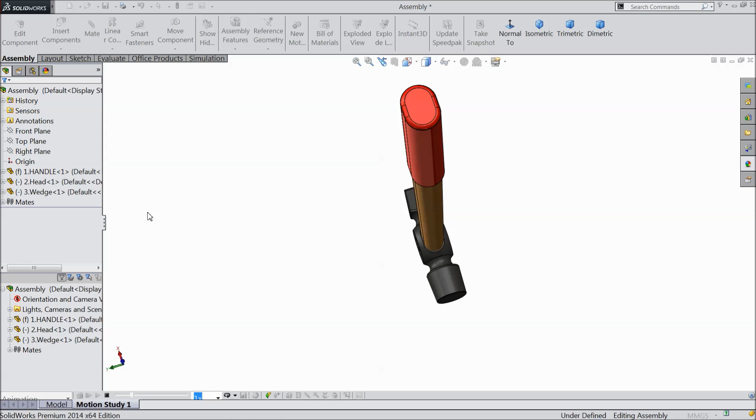Today we are going to design and assemble a simple hammer. This is the real hammer. We will design each and every part and you will see how to make the assembly. I hope you like it. So let's see how to do it in Solidworks. Here you can note down the dimensions.

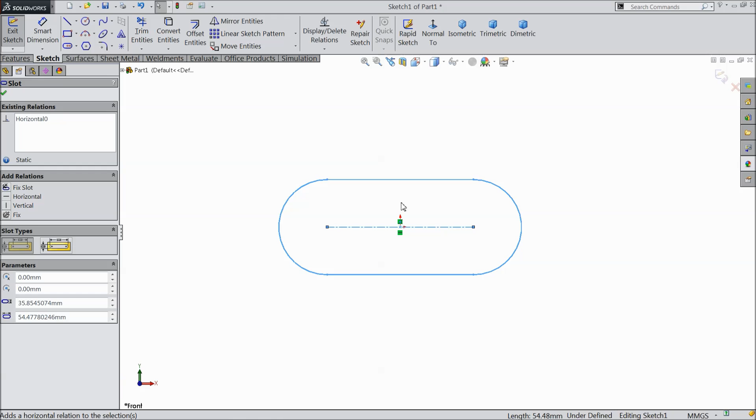Let's make the first part, the hammer handle. Select right plane, front plane, sketch, and here select center point straight slot. Draw a straight slot, exit, select this line and make horizontal relation. Now let's define this length, keep 6 mm, and select this radius and keep it 5.5 mm.

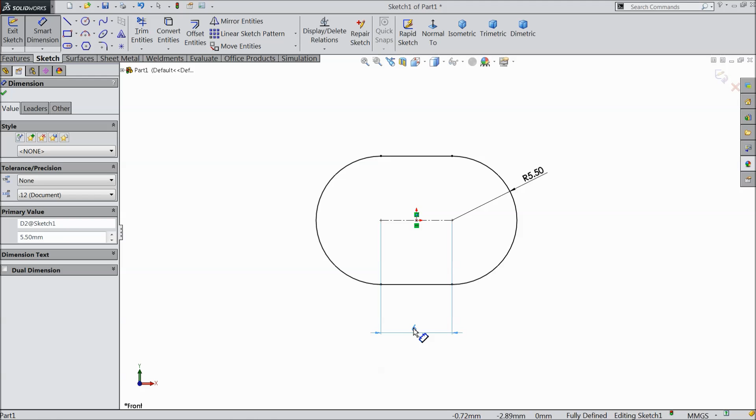Now let's extrude it, up to 250 mm, and select here 0.7 degree. See, it's going to be sharp. We want upward outward direction. See, okay.

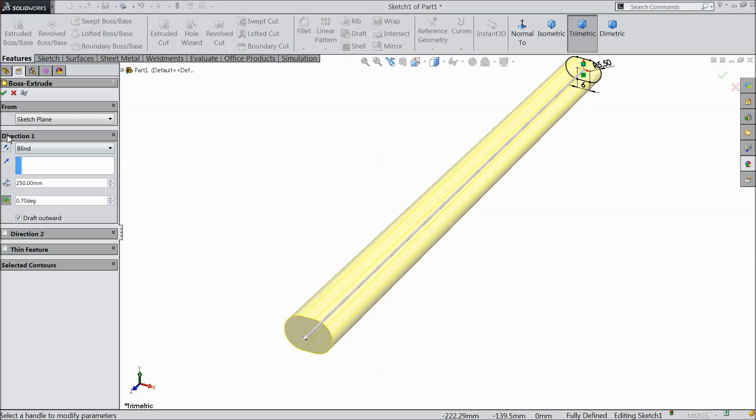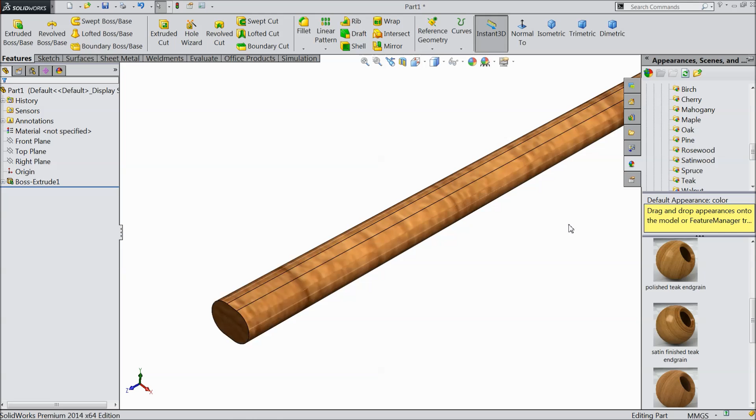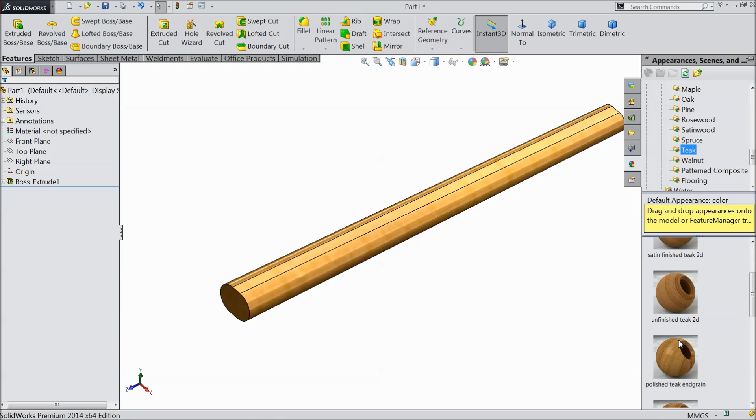Now just click on part 1 and go to design library and select organic wood, and we will define some material, some wood for the handle. I think cherry, no, this is... okay, because we do not have much options, so we have to select any one. Polished teak. Okay, now...

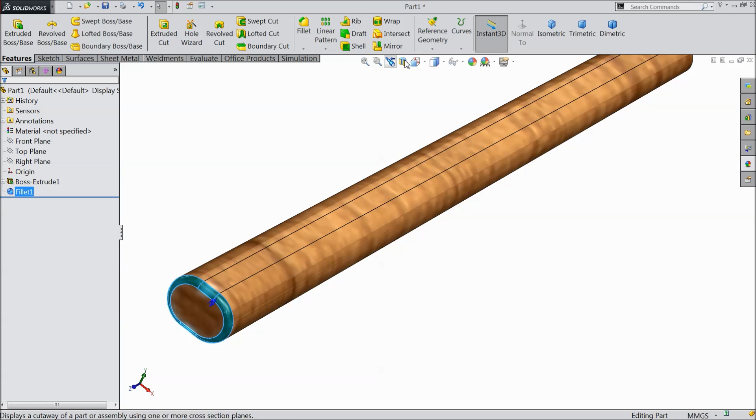Select fillet, keep 2 mm and select this face. Okay, now select this fillet and define the color red. This face also, cancel, only choose fillet. Okay, select this face. Okay.

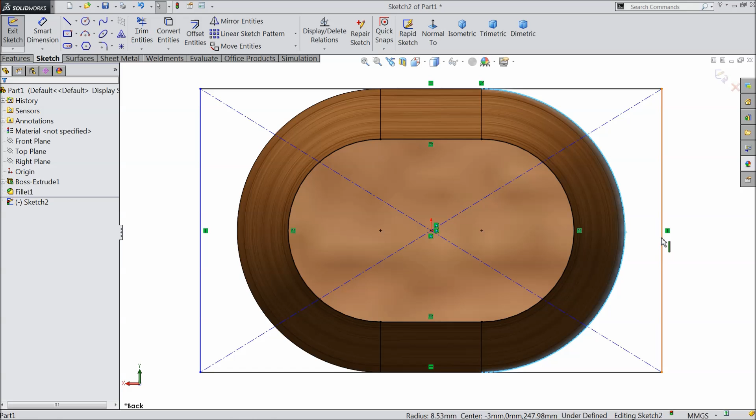Now select this face, sketch, normal. First do one thing, just convert this face. Okay, now select center rectangle and draw a rectangle. Now select this line and this line, collinear. Here also select this outer line and this line and make relation tangent. That's it.

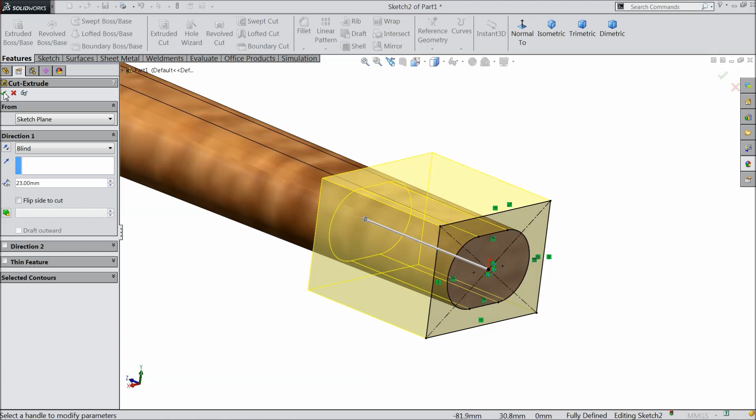Okay, now select extruded cut. We want to cut inside up to 23 mm. See here. Okay, now that much is selected.

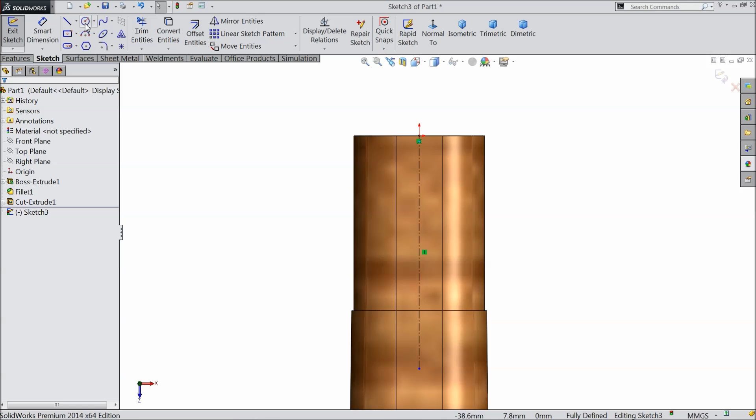Now select this face, sketch normal, draw a center line, select circle and draw a circle up to this point. Let's make the diameter 28 mm. Select a line, let's start from this point up to this point, exit, mirror this line. Okay, now connect both the ends, that's it.

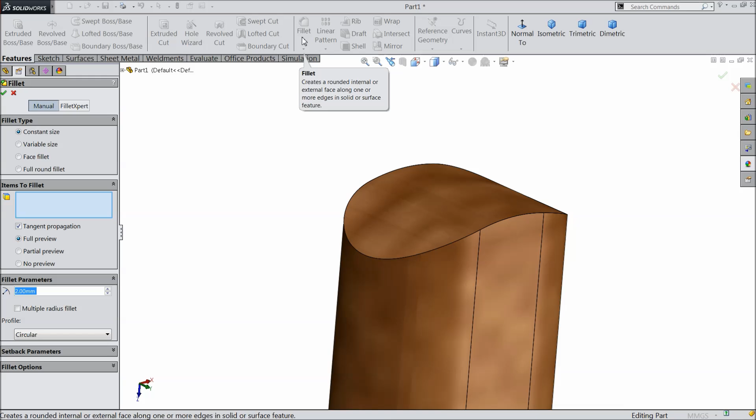Now let's assign the distance from this end, keep here 3 mm. Okay. Choose trim entity and trim this outer circle, that's it. Now we want to extrude this portion so it becomes round. See here, select through all, okay. Now choose fillet, select face and 0.5 mm, that's it.

Now we want to make some cutout here, because always in a hammer there is a cutout to support the hammer rod or hammer piece and wedge. So let's do one thing.

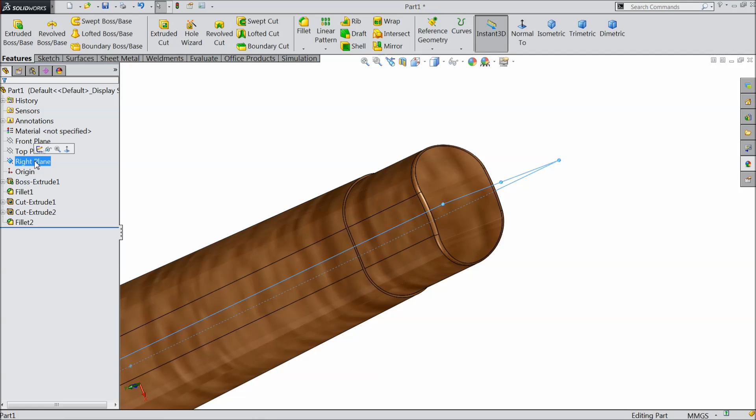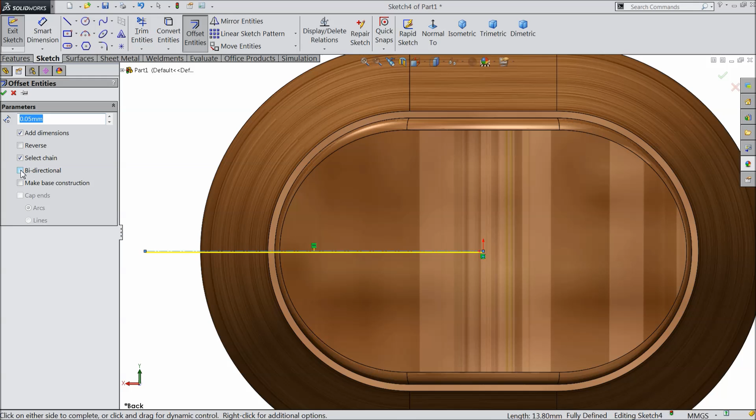Select right plane, sketch normal. Again, okay, this face we want. First do one thing, draw a center line, a horizontal center line. Select the line and make sure it is horizontal. Now select the line and select offset entities, and here select 0.05, bidirectional, select bidirectional. Okay.

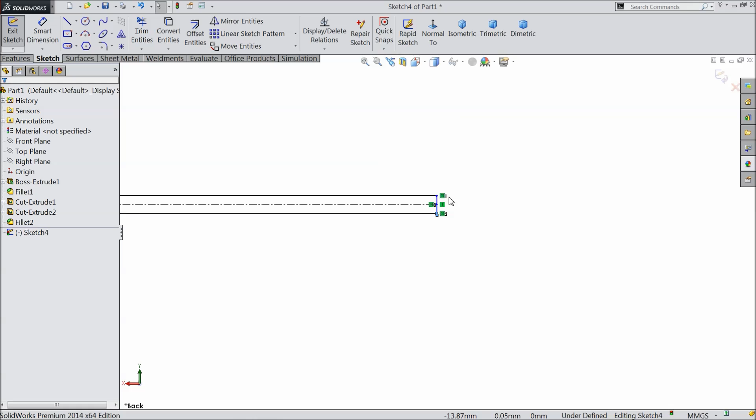We can make it better, make it mirror. Select this 3 lines. Okay. Now let's close this line. Here also just close the line. Now this 0.05, 0.05, 0.01.

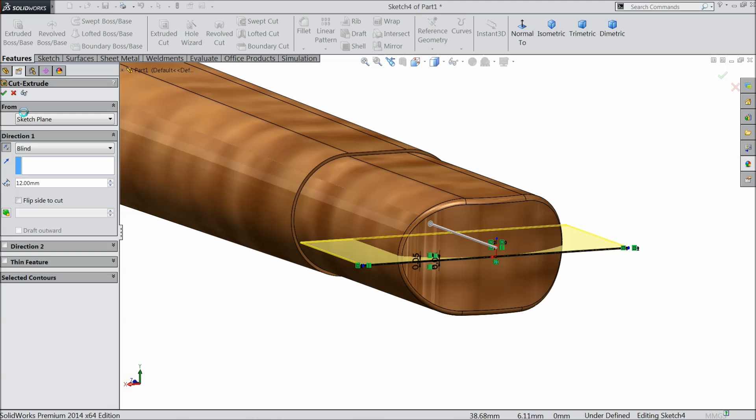Now here we want to extrude inside. Select extrude cut. Choose here reverse direction and make depth only 12 mm. Okay. Now you can see it here.

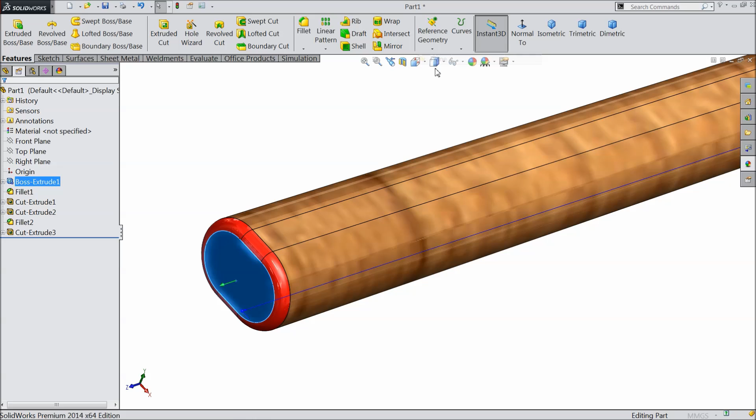Now we want to create a plane here, so do one thing, select this face, plane, and select this edge, select parallel. See, okay. Now select this plane, sketch normal, first select outer edges, convert. It's difficult to select, but we have to select, convert.

Now this is already converted. Now choose offset entities, select here 0.2, select chain. Now select this line, see it's going outward direction. Okay, now it's already selected.

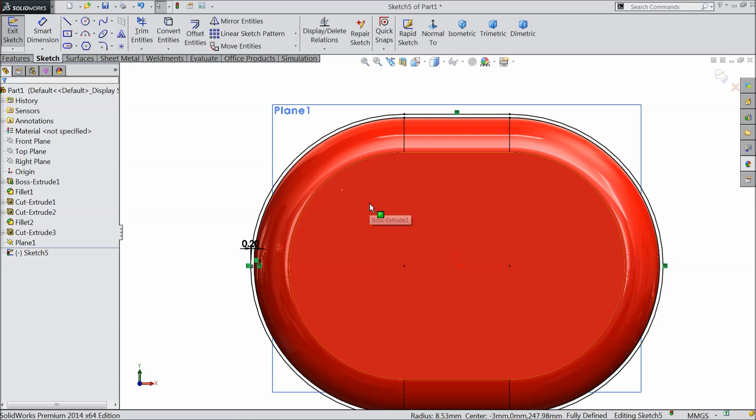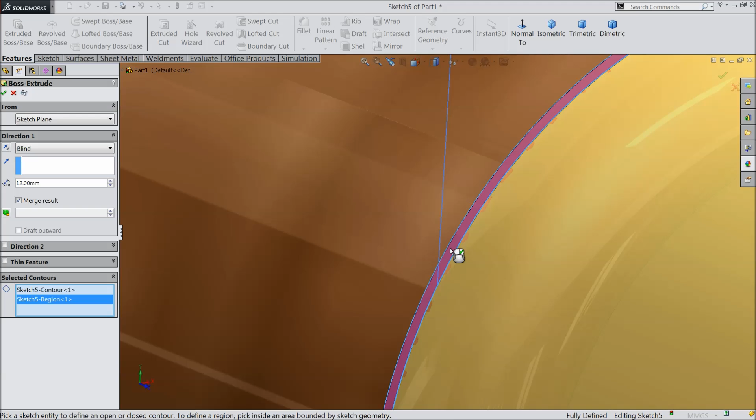Now select extruded boss, and here we have to select the face. We need to select here 2 lines, this inside and this inside ring also. Select reverse direction and extrude up to 90 mm. Okay.

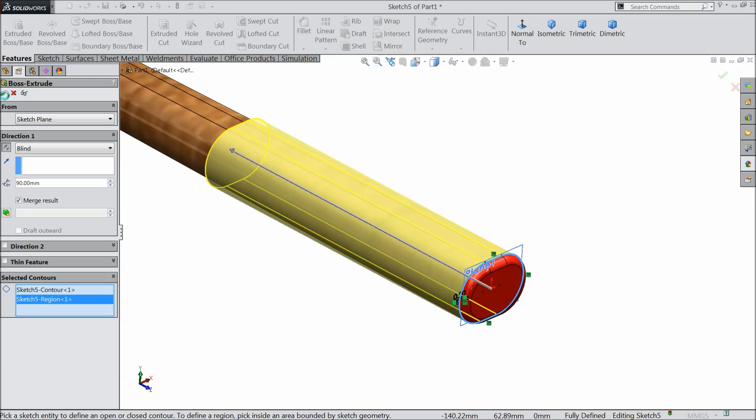Now select this face and define a color red. Okay. Choose fillet. Select 1 mm and select this outer edge. Okay.

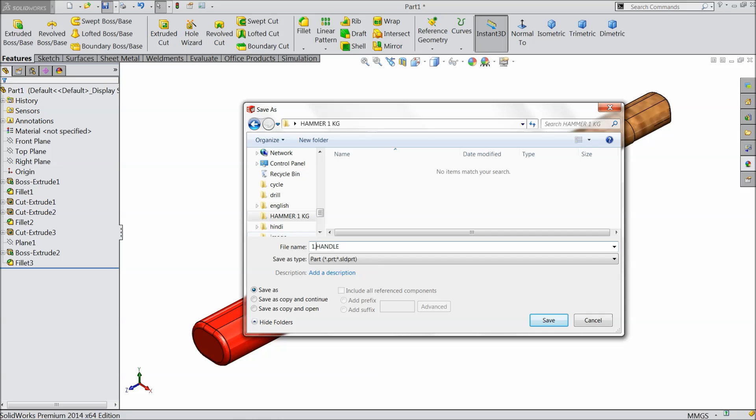Now this is our hammer. Just hide this plane. This is the hammer rod or handle. Just save this part. Go to desktop, create hammer 1 kg. And this is handle part 1. Now save it. Let's see the next part.

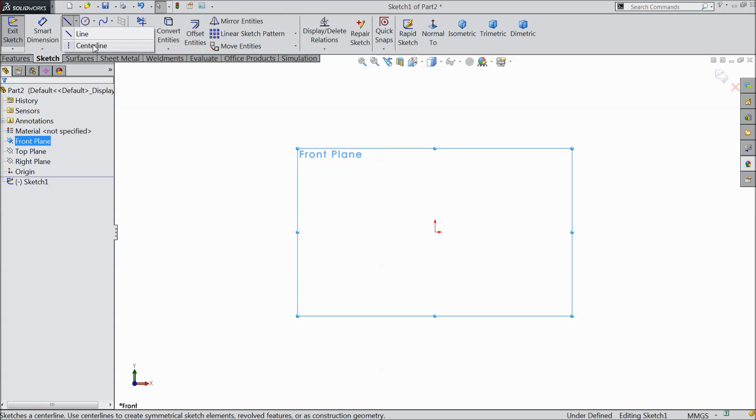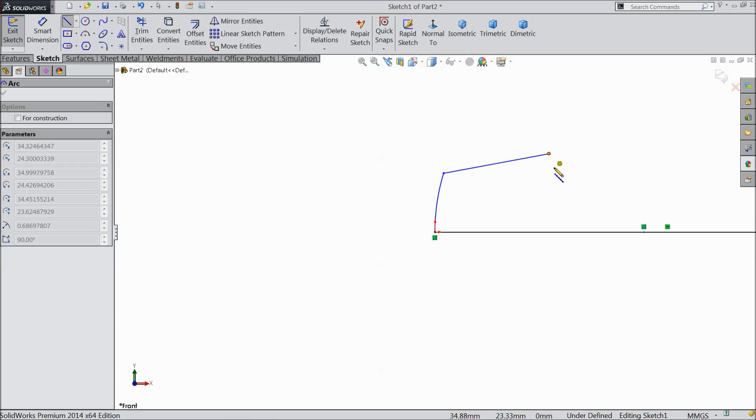Let's make the next part, the hammer head. We will select the same plane, front plane, sketch. Let's start directly with a line and connect up to here and convert it to a curve, connect it here and draw a circle. Okay, then again create one, again draw a circle and connect with this line.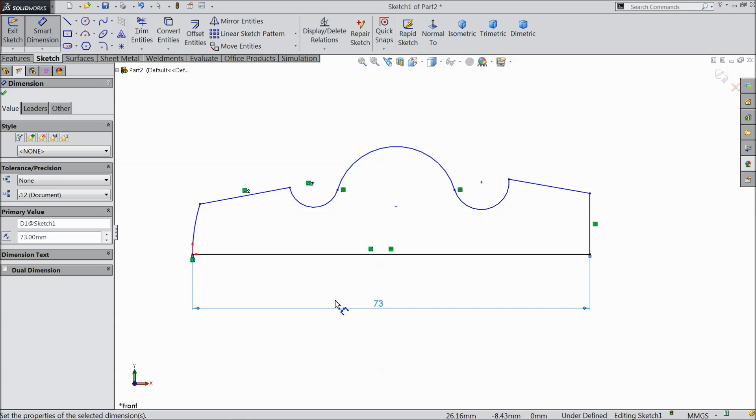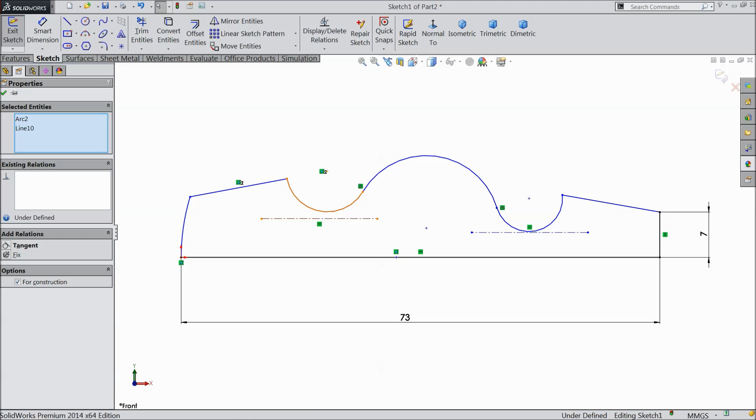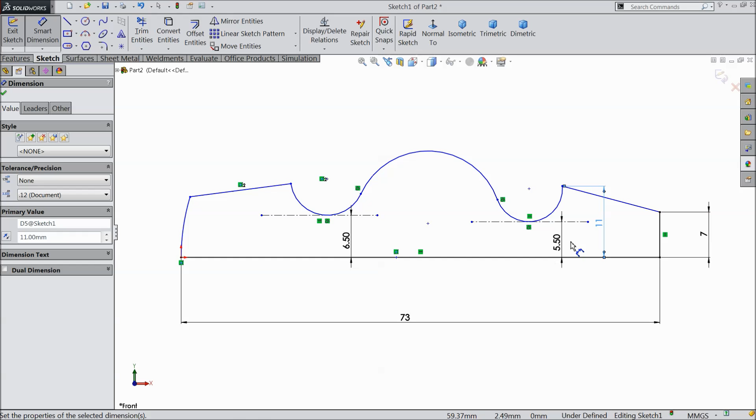Exit. Now this is a kind of geometry, so let's define it: 73 mm, 7 mm. Now draw one horizontal line, select again a center line, and make relation tangent. The same here, this line also make relation tangent. Now let's define the gap 5.5 mm, 6.5 mm. Now let's define this gap 11 mm. Now the distance between these two, keep 30 mm.

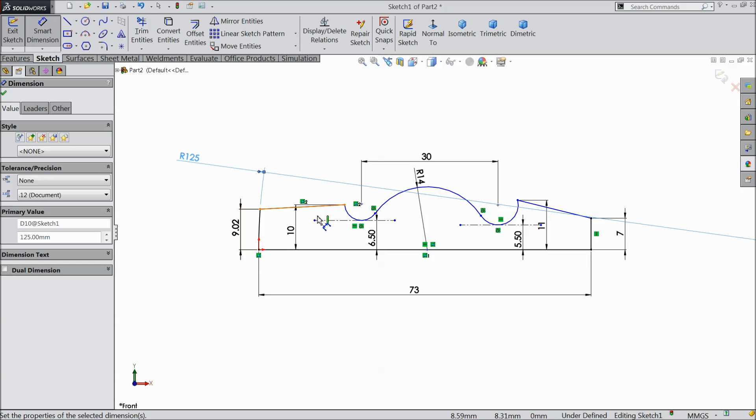Make sure the radius is 14 mm. Now select this radius center point and this line and make relation coincide. Okay. Now define this point 10 mm. Now this point 9.018 mm and define this radius 125 mm. Okay. Now select this circle and this line and make relation coincide. Okay.

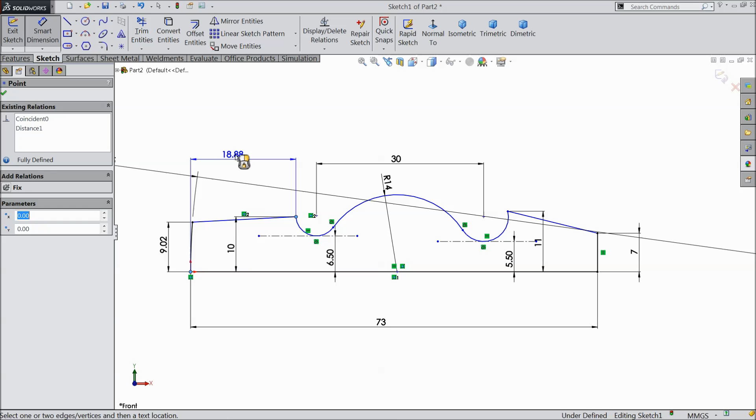Now we will find out what exactly is missing. Everything is almost there, let's define this gap 18 mm. Now see, our geometry becomes fully defined. So this is our geometry. Okay, now select revolve boss base. Select this bottom line as an axis. Okay, now see here.

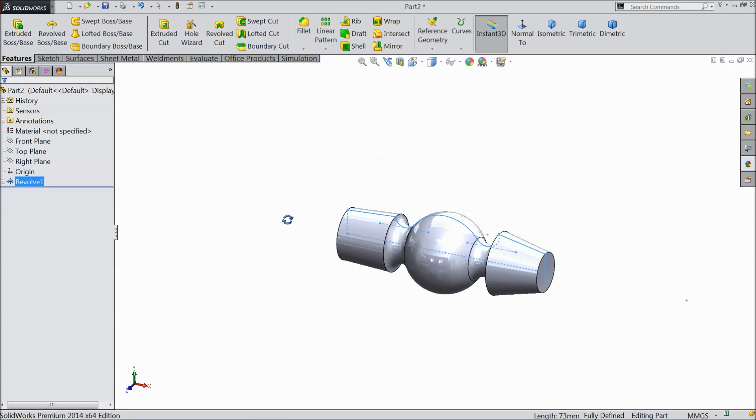Now select top plane, sketch normal, draw a center line. Now here we want to create some holes. First we will make some geometry.

Let's define from this point to this point. Again choose line, go to vertical, connect with this line, and connect with this point. Exit. Select these two lines and make relation collinear. That's it. Select this line, make relation horizontal.

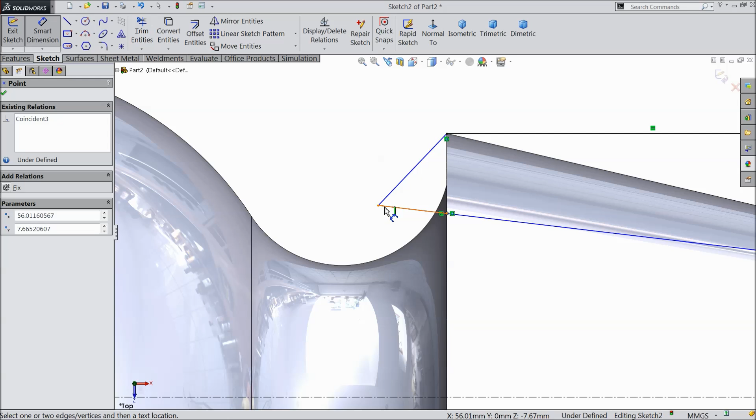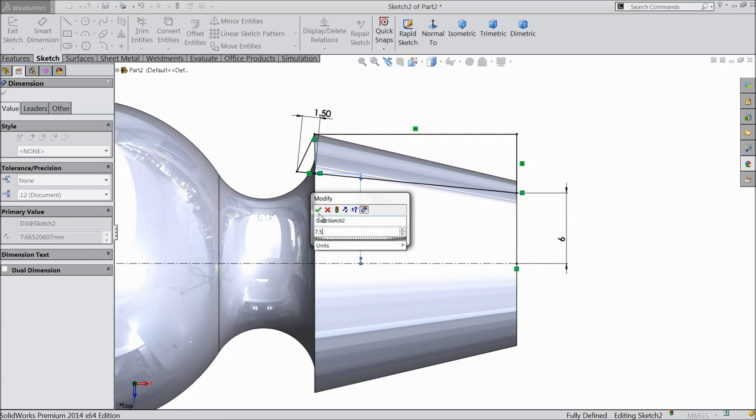Now let's define this line. 1.5 mm. That's it. Now we will define the distance from here, 6 mm, and define this point, 7.5 mm. Okay, now let's start here. This is the center point. Select center point rectangle slot.

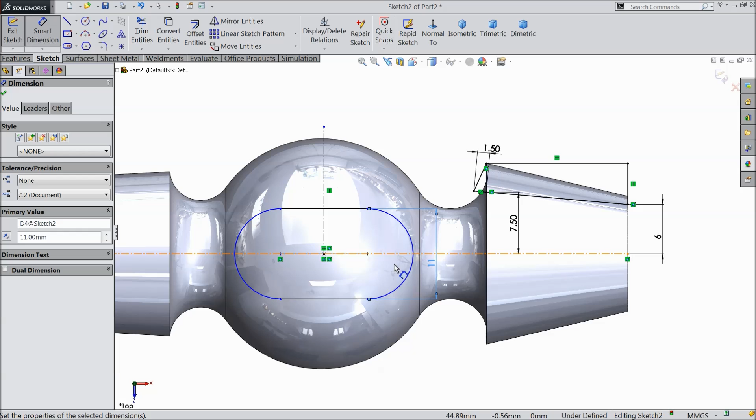Now define the width 11 mm and the distance 6 mm. Okay, select here corner rectangle and define a rectangle. Okay, now select this center line and these two rectangles, make relation symmetric.

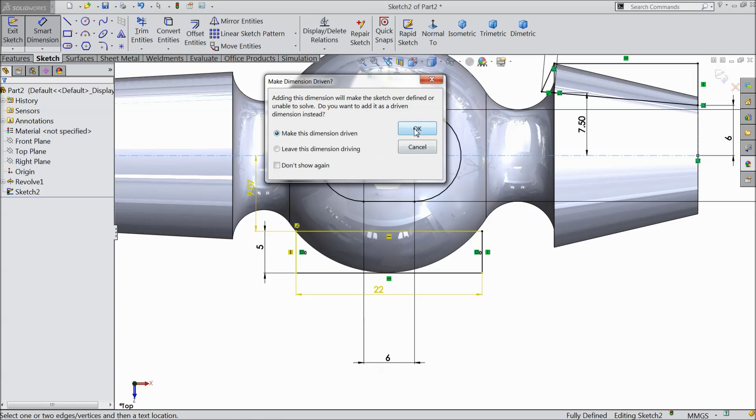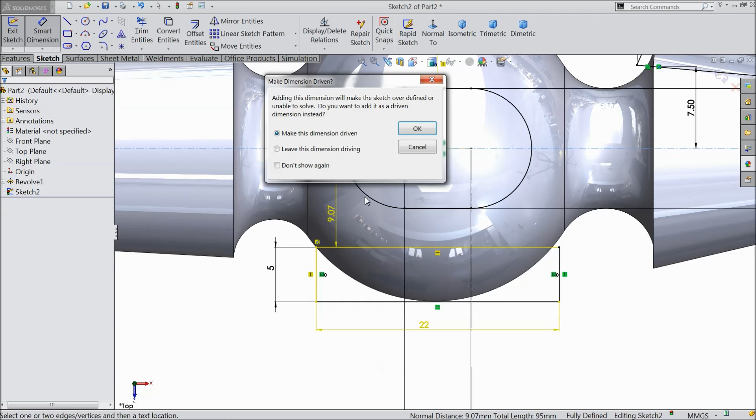Now define it, 5 mm, 22 mm, and the distance from center line. Okay, delete this relation. Again try, delete this coincident point. Now let's try 9 mm. Okay,

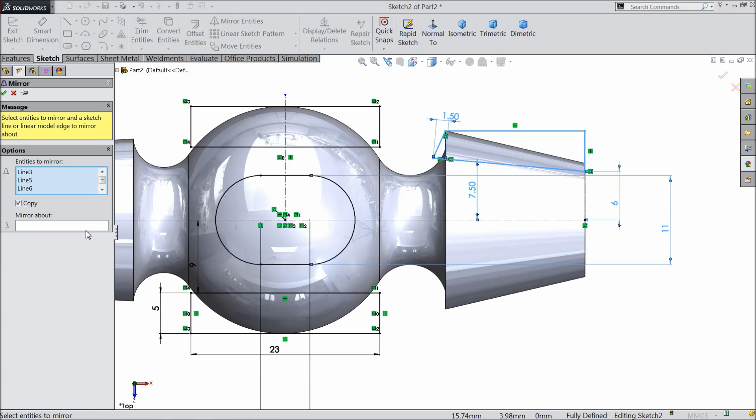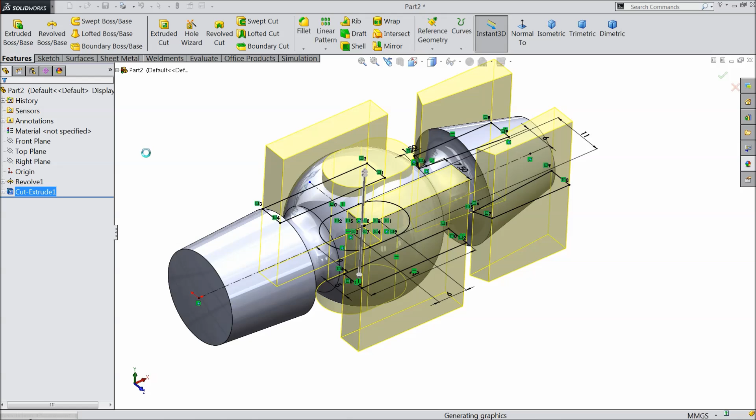now this portion we want to extrude or cut. Select extruded cut. Choose here through all both. Select OK. Now see, it took almost the face. Front plane sketch. Now here we want to cut some more faces.

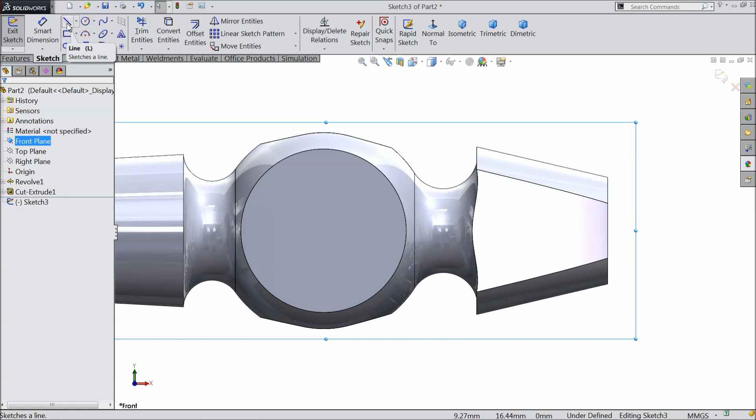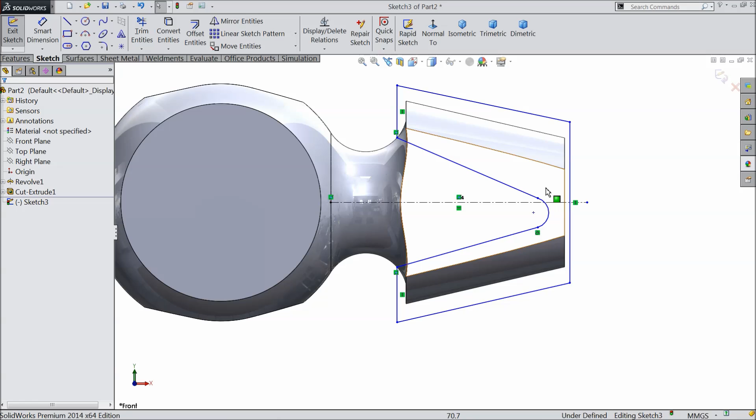Select a line. Connect with this face. Okay. Connect with this line and connect this point. Exit. First let's draw the center line. Okay. Now select these three lines and make relation symmetric. Okay. Tangent. Select this circle and this line, make relation tangent.

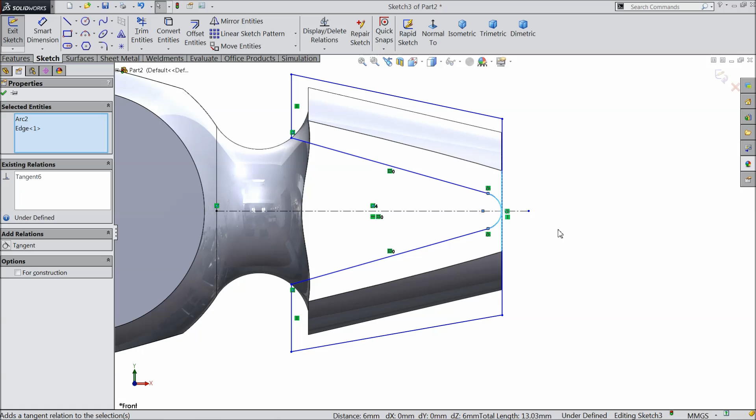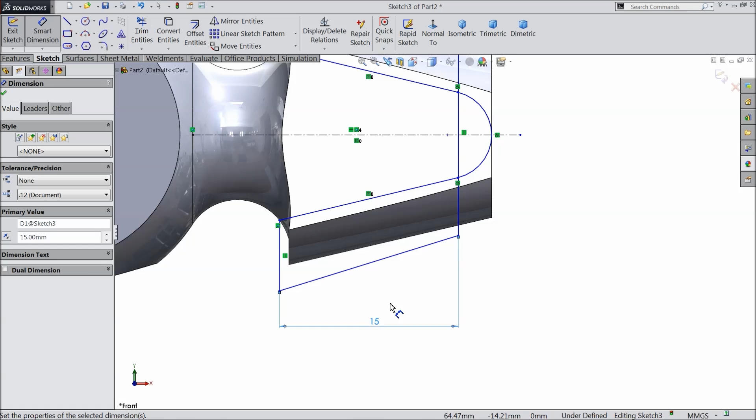Just go back. Okay. Select. Okay. Now let's define the dimension. 18 mm. That's it. Select these two lines and make relation collinear. Okay. Now define this width, 14 mm.

Okay. Now select these two outer lines and select center line also and make relation symmetric. Okay. Now this geometry is symmetric. Now define both the outer edges, 22 mm. Inside 16 mm. Make it 23 mm. Okay. And define this radius, 2 mm only. Now our geometry is fully defined.

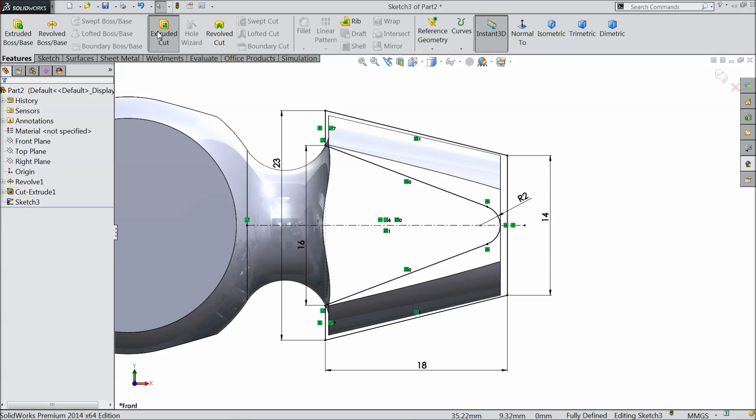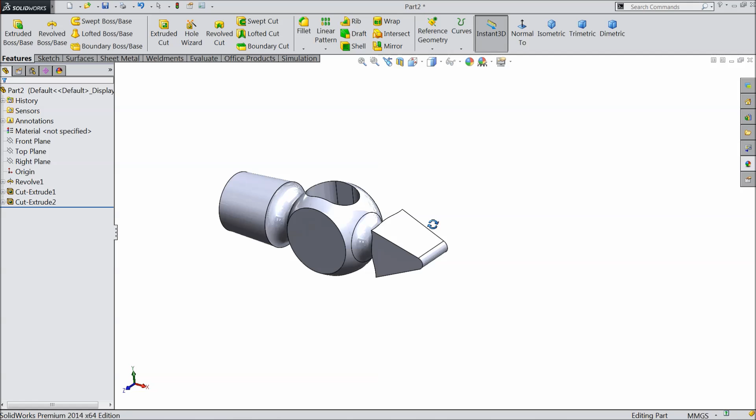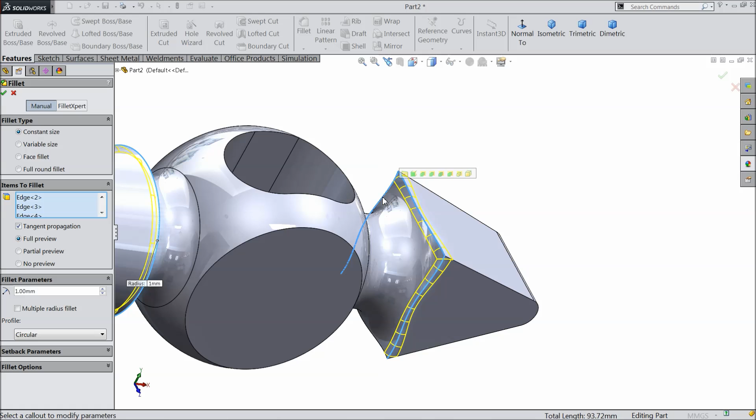So select extruded cut. Select here through all both directions. See. Okay. Now see, it already took the shape. Sharp edge. Choose fillet. Select 1 mm. Select this face. Okay. Now again choose fillet. Keep 0.5 mm. Select both the opposite edges and these two edges. Okay.

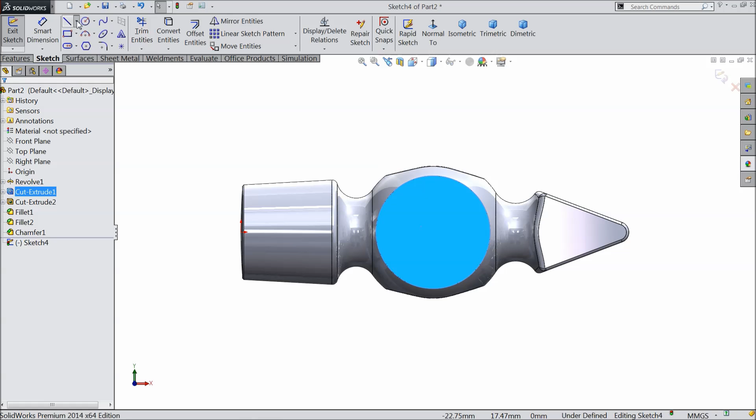Now select chamfer 0.2 mm and select this face. Now that's it. Select this face, sketch, and here we will write something. Draw a center line. Select one start point and define this 1.5 mm and distance from this point 6 mm. Okay, now select here, write 1.0 kg, and choose here font 3 mm.

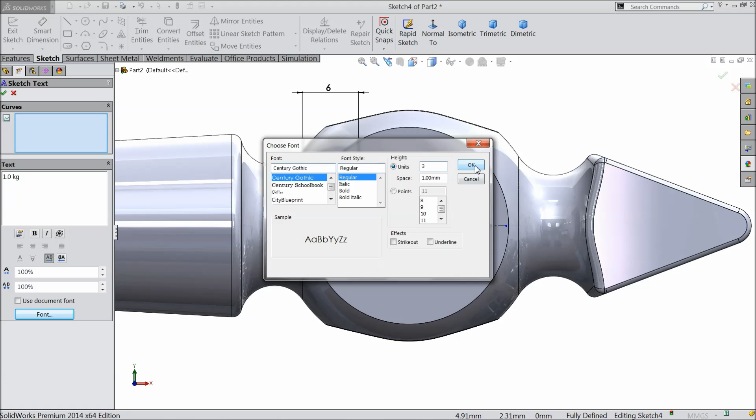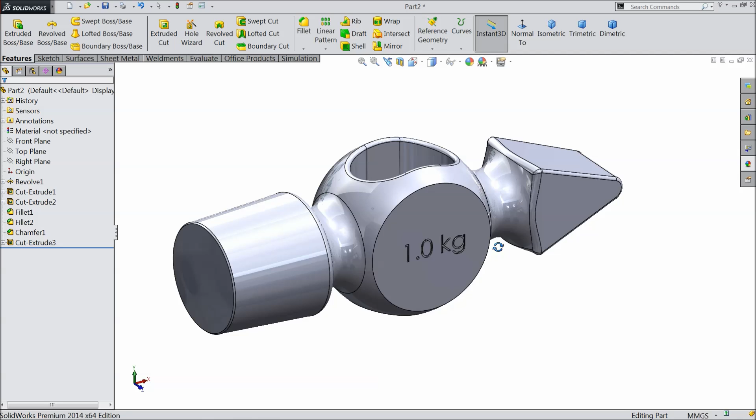Okay, now select extruded cut and make the depth 0.2 mm. Okay, now see, this is our hammer head. Just go to appearance, steel, and select iron, and we will prefer cast iron. See, this is the hammer. Now save this part number 2, head. Let's see the next part.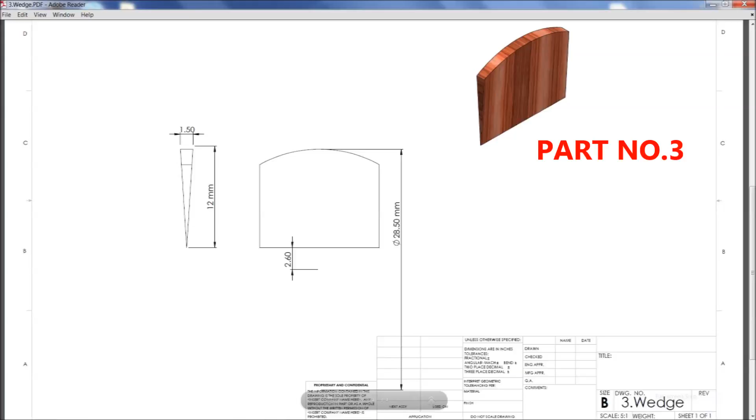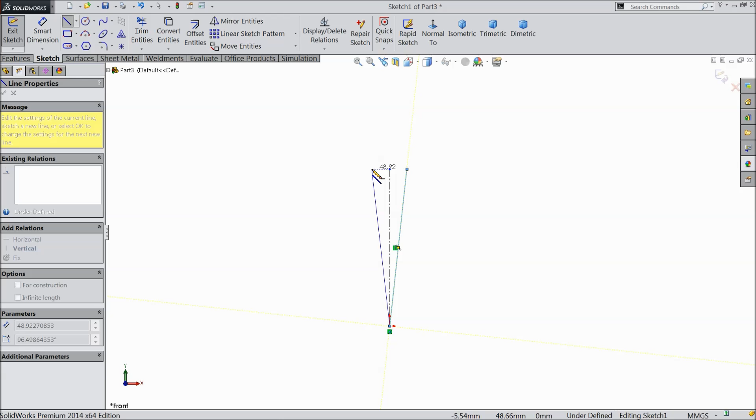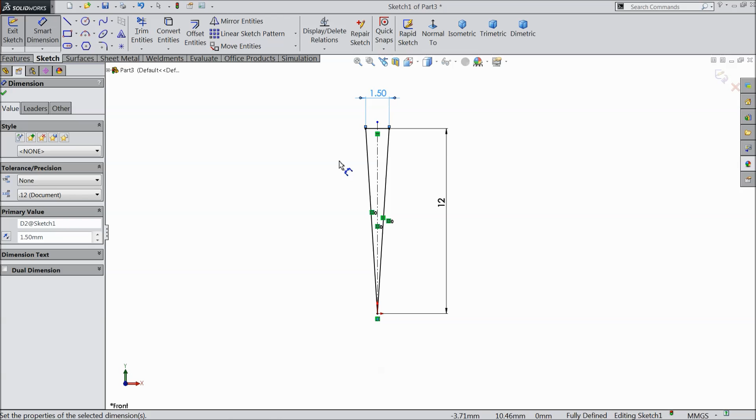Let's make the next part, wedge. Choose front plane, sketch, draw a vertical center line. Now let's select line. And connect with this line. Select this midline and make relation vertical, and select these 3 lines and make relation symmetric. Now let's define it. Keep the height 12 mm, 1.5 mm. Okay, and extrude it up to 14 mm.

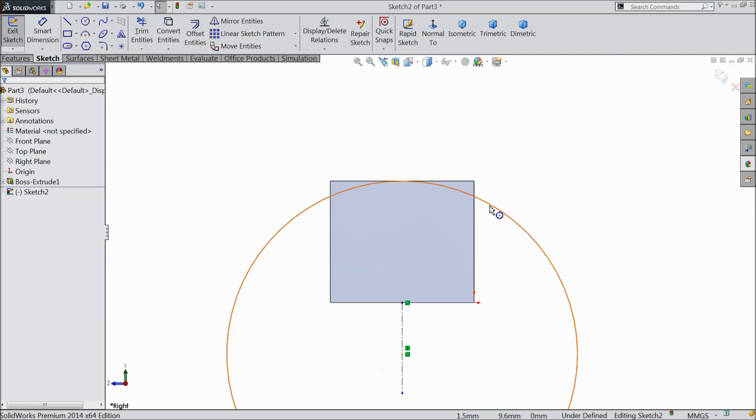Okay, now select right plane, sketch, normal, select circle. First draw a center line, make sure it is vertical. Now select circle and draw a circle and make sure it passes through. I think no need to pass. Okay, just define the diameter 28.5 mm and the center distance from bottom line 2.6 mm.

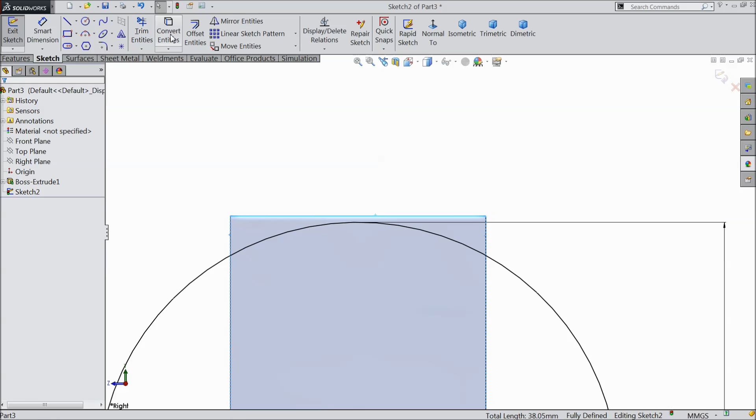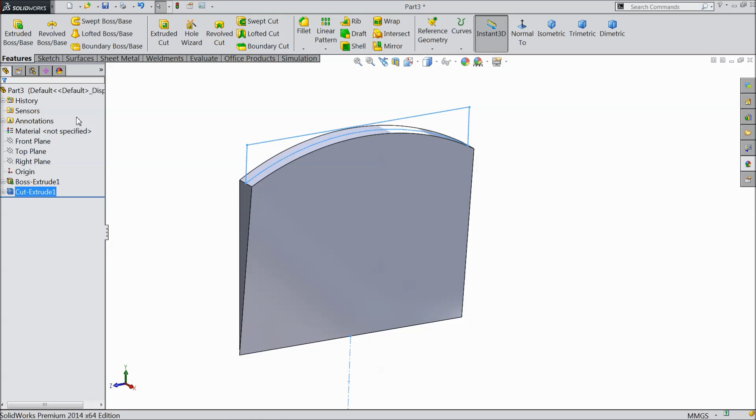Okay, select this top line and both side lines, convert entities. Select trim entities and trim these outer lines. Now this portion we want to cut. See, select here through all both. Okay, now the wedge is ready. Now let's define some material, wood color. So just go to organic and you will find the option wood. That's better, polished rosewood. Now save this part, wedge.

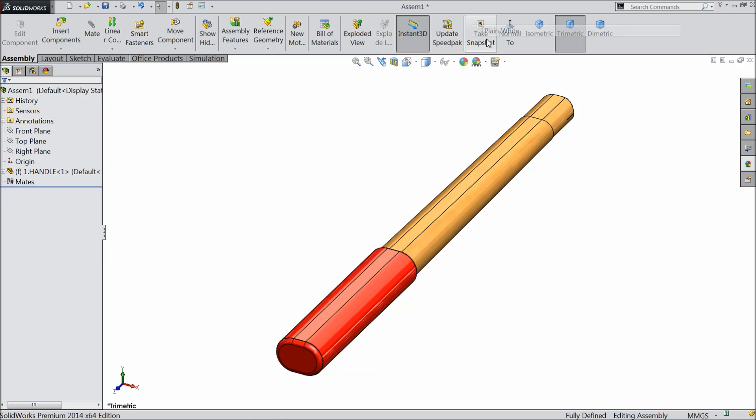Now let's start the assembly of hammer, 1 kg hammer. Select new assembly. Okay. Now this is the assembly window of SolidWorks. So let's browse our first part, handle. Now just rotate this. Okay, we will fix our head here. Now select both the parts, head and wedge. This is head and this is wedge. Now let's rotate.

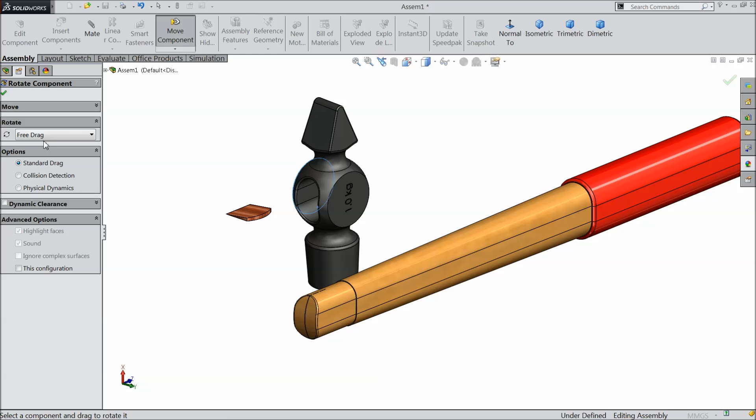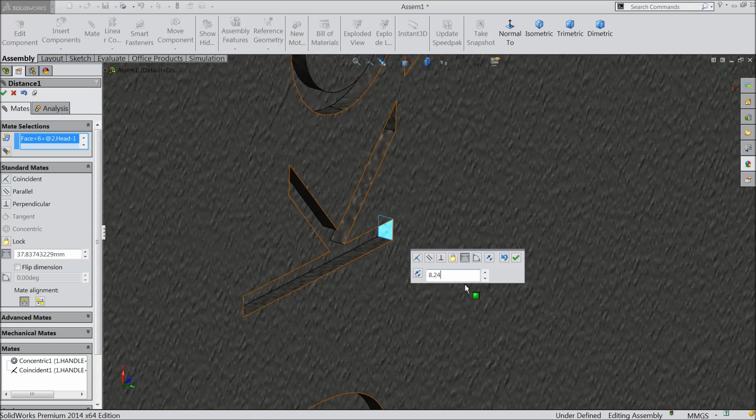Okay, now choose mate. Select this face and this face. Make relation concentric. Okay, now take it out. Select this face and select this face. Coincident. Okay, now we will create one relation. Select this face and select this face. Define a gap, 8.2438. Select OK. Now see, the hammer is fixed in its place.

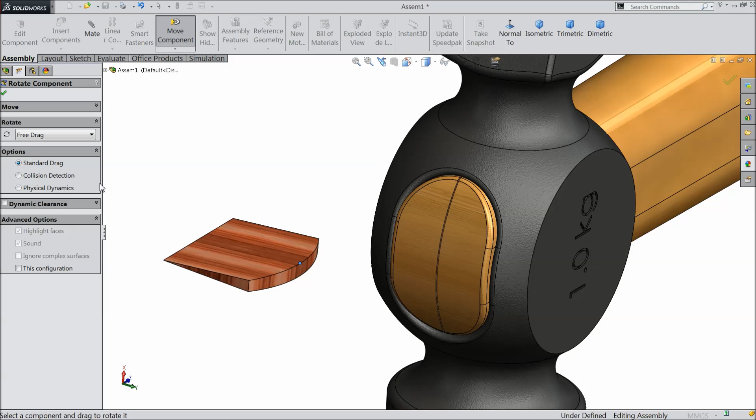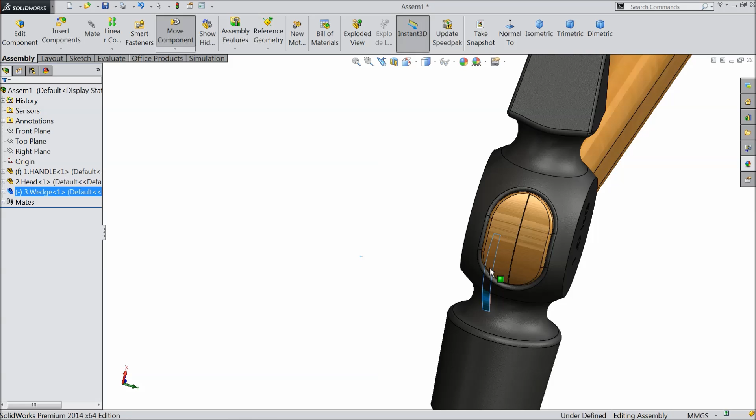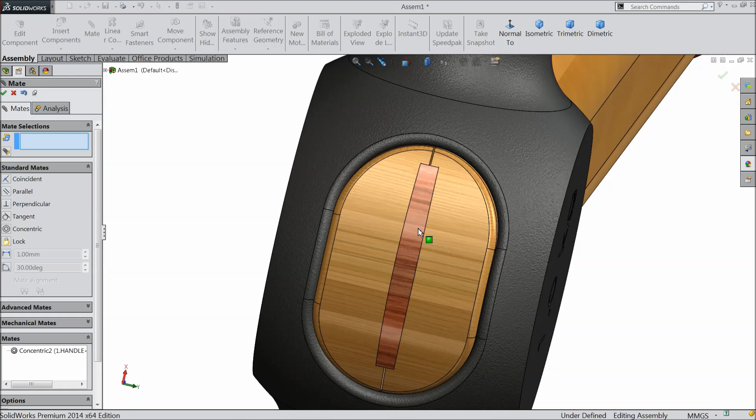Now the last part. First we will rotate this part. Okay. Now select mate. Select this face and this face. Make the relation concentric. Okay. Now you can see this is the manual wedge. We can fix it manually so that this head will not come out. Okay. So now see, this is our hammer. This is ready. This is 1 kg head. See, this is the actual real dimension.